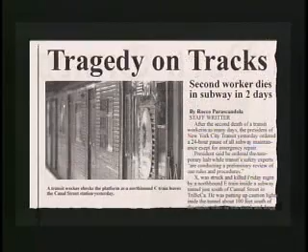Subway signals can be dangerous work. Tonight, investigators are looking into the death of a subway worker who was hit by a train on the Upper West Side. We have breaking news on the Upper West Side. A train has hit a transit worker, actually has killed him, trapped him under the train. Number 3 line service is suspended. After the death of a subway maintenance worker, he was killed when he was hit by a train yesterday, and now some are asking, did the transit... After the death last week on the tracks of 2 transit workers, there remain several unresolved safety questions.

Hey, Charlie, what you doing? Hey, Howard. Morning, Charlie. Morning, Chris. How was your night? Not too bad. Just had a dark signal, track circuit a couple hours after that. Nothing big. Yeah, but we didn't get to finish the stuff we were scheduled to do. Oh, yeah, thanks for reminding me.

Listen, Charlie, you think you can help us out a little bit? Just a couple of stop arms that need to be gauged and painted. Yeah, no problem. Steve and I'll take care of it if we have the time. Where is Steve, by the way? He's usually here before me. Haven't seen him. He must be running a little late. You'll take care of that for me, right, Charlie? I don't want to get tied up with this routine stuff before I go on vacation. I'll pay you back. Yeah, okay, no problem. I'll see you guys tomorrow. All right, take care. Take care, Charlie. Yeah, see ya.

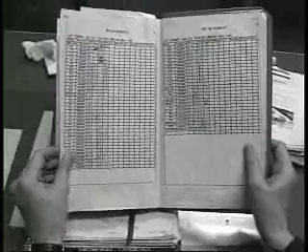I don't want to have to wait around here all day for Bobby to get back to me. Maybe I'll just call him. Busy. Figured. Probably forgot about me. He said he was going to call back in a little while. That was an hour and a half ago. Maybe there's some small jobs I can take care of on my own. Something I can get done without Steve having to help. What routine stuff do we have scheduled for the next couple of days? Most of this stuff I'd need Steve to help me with. Hey, what about that stuff Howie and Chris were talking about? Something to do with stop arms, gauging them or something? I'll probably be back before Bobby remembers to call me. Now, where were they?

Here it is. Good. They're one stop away. Right near that spur track that's hardly used. Good. This will be a piece of cake. I can go there, gauge those 2 stop arms, and be back before anybody knows it. And I can definitely take care of this without Steve. I don't even need him to flag for me, since that spur is hardly ever used. I don't think they use it to turn trains anymore. I'll probably even have time to stop and pick up lunch on the way back. ...anyone knows it.

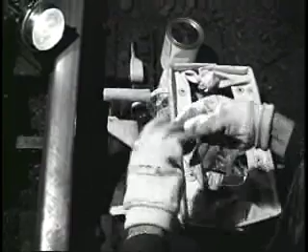I hope he's okay. This must be the one. Let's finish this up and get back to the quarters. Oh my God!

And that's how it happened. This incident could have been prevented had the rules and regulations governing employees working on the tracks been followed. These rules and regulations outline the procedures that protect you from the major hazards found on the tracks.

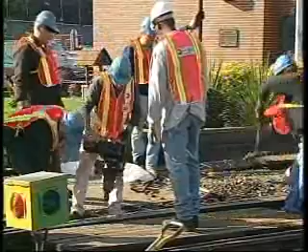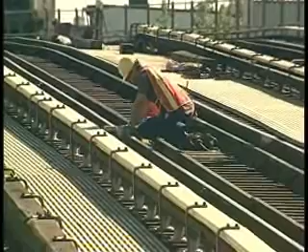The major hazards to be aware of when working on or near the tracks are moving trains, energized third rails, physical condition and configuration of tracks. At least one of these hazards is always a factor in all employee accidents on or near the tracks. The cause of employee accidents on or near the tracks can always be traced to employees forgetting the seriousness of these hazards and by not working safely.

The most frequent causes of employee accidents on the tracks are stepping onto a track without first looking in both directions, walking in the same direction as train traffic, not clearing up properly, not setting up or working without proper flagging protection, obscured vision of train traffic due to track configuration, encountering unexpected train movements, coming in contact with an energized third rail.

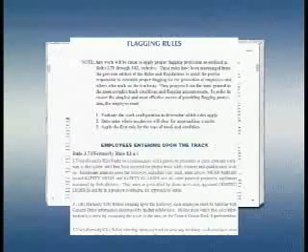All these causes can be neutralized and accidents eliminated by following established methods and procedures as outlined in the MTA New York City Transit Rules and Regulations. These methods and procedures are taught to all personnel whose duties and responsibilities require them to work on or about the tracks. Under no circumstances will any employee be permitted to enter upon the trackway until they have received the proper track safety training and are duly qualified to enter upon the tracks.

Before any work is performed on the tracks by you or any employee, your supervisor must hold a pre-job meeting to designate a flagger, describe the type of flagging protection to be used, as well as outline the work to be performed. The designated flagger will not perform any duties other than those of a flagger. The supervisor must also provide an opportunity for you to discuss all concerns you may have about the work that is to be performed. The supervisor will also ensure that all employees are wearing the proper personal protective equipment.

All employees working on the tracks must familiarize themselves with all general orders that may be in effect in the area where they will be working. You must verify that this information is current by contacting the interlocking tower for the work area or the RTO Control Center Desk Superintendent. Before entering upon the tracks, you must notify the RTO Control Center to inform them of your location by train line, nearest station, track number, and survey marker.

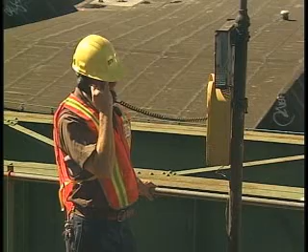You will also tell the RTO Control Center the type of work that is being performed and the type of flagging being used. You should also give your department, name, title, and pass number. Remember to get the name, title, and pass number of the individual you are speaking with. You should remember to look in both directions for oncoming trains before descending to the trackway.

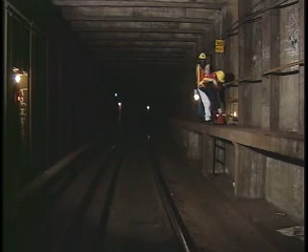When using a ladder to descend to the tracks, you should exercise caution and always use the 3 points of contact rule of thumb. The 3 points of contact rule of thumb should also be used by all employees that may have to climb up and down a train. 3 points of contact will help prevent you from losing your balance while climbing up or down from the tracks or a train. Simply stated, the 3 points of contact rule of thumb emphasizes maintaining a secure grip with both hands and secure placement of one foot, or secure placement of both feet and secure grip with one hand, to maintain balance and safe ascent and descent.

While performing any duties on the tracks, you must always wear your safety vest. You should not wear loose or ill-fitting clothes, tinted or dark glasses, or any device that would impede your vision or hearing. Once on the tracks, you must be constantly aware of your surroundings and alert for oncoming trains.

Keep in mind that the use of continuous welded rails has diminished the noise generated by oncoming trains. Also, newer train equipment runs quieter than that of the past. You should always be aware of no clearance areas and safety niches. You must also be extremely cautious when walking along the trackway to avoid slipping, tripping, or falling hazards.

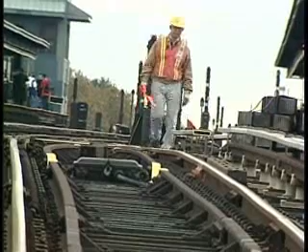Remember to walk against the normal direction of traffic, being mindful that trains may run in either direction at any time. While walking on the tracks, you should stop before turning around to look behind you for any reason, especially for oncoming trains. You should only walk in the area of track where the cross ties and ballast or concrete are, or on approved walkways, such as bench walls or catwalks.

You should avoid walking or stepping on running rails. Also, never walk between a running rail and the third rail. Always assume the third rail is energized and avoid walking or stepping on the third rail protection board. Avoid walking over, on, or near the moving parts of an interlocking switch. You must be aware that the switch can be activated at any moment, and never assume that an area of track is out of service.

Employees not working on the tracks, such as train crews walking to a train on a storage track or personnel walking to an interlocking tower, do not need to display any special warning lights or flags, nor to set up full flagging. They do, however, need to be equipped with an approved light and all necessary personal protective equipment. They must also exercise caution when walking on the tracks.

MTA New York City Transit has established a uniform method and procedure for all employees who perform work on the tracks in pairs or small groups, and who may move from point to point along the tracks. No employee is allowed to perform any work on the tracks at any time at any location, unless accompanied by a qualified flagger.

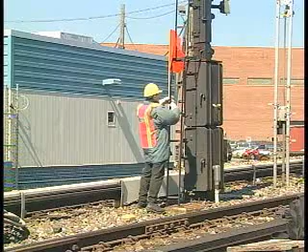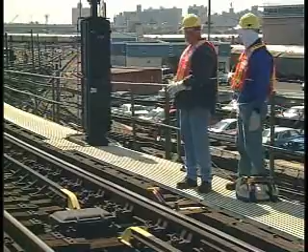If the work being performed is outside, between sunrise and sunset, the flagger must be equipped with a whistle and an approved fluorescent orange flag. The flagger will place the light or flag 650 feet from the beginning of the work area and will perform no duties other than acting as flagger. The flagger must be positioned no less than 50 feet from the work area and be able to communicate with the workers and have an unobstructed view of the caution light or flag.

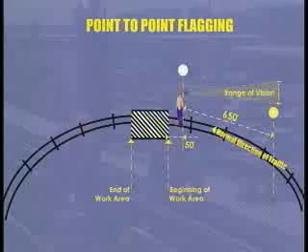If, for any reason, the flagger's view of the light or flag is obstructed, or communication with the work group is not possible from the flagger's position, full flagging protection must be established before any work may be done.

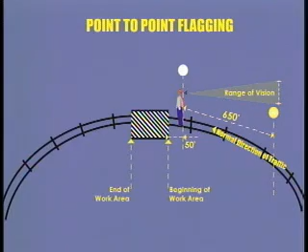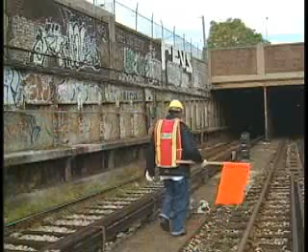If the work being done is between two tracks, or on a lead track, loop track, or mainline middle track, or where it's not uncommon for trains to operate in either direction, an additional flagger equipped with a whistle and flashing yellow light or fluorescent orange flag is required.

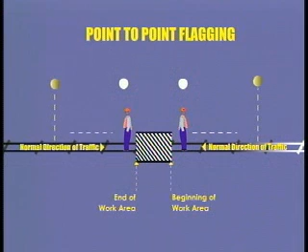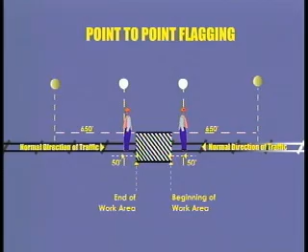Each flagger will place a light or flag 650 feet from their end of the work area and will not perform any other duties while acting as a flagger. Each flagger will be positioned no less than 50 feet from the end of the work area, and both are responsible for warning the work group of approaching trains from their positions.

Whenever work is being performed on a station platform within 2 feet 6 inches of the edge of the platform, or you're working on a ladder that is within a distance equal to or less than the height of the ladder, a flashing yellow light or fluorescent orange flag must be placed no less than 650 feet in advance of the work area and in the tunnel, open cut, or elevated structure.

If for any reason the sight of flashing yellow light or orange flag is obscured, full flagging protection is required. In all cases, the flagger must be able to see the light or flag and be able to see and communicate with those in the work area. Otherwise, full flagging protection must be used.

When any work being done requires full flagging protection, the supervisor of the work group will not allow any worker to go on the tracks until full flagging protection, as outlined in the pre-job meeting, has been established. Before flagging protection is established, the maintenance supervisor will notify the RTO control center and request permission to set up full flagging protection so that track work may begin.

To establish the basic full flagging protection, at least 2 qualified flaggers are needed. One flagger will set up the necessary lights or flags, while the other flagger watches for and warns of approaching trains. The correct way to set up full flagging protection is for you to first set out the green light or flag. The green light or flag must be placed no less than a maximum train length from the end of the work area for the subdivision where the work is being done.

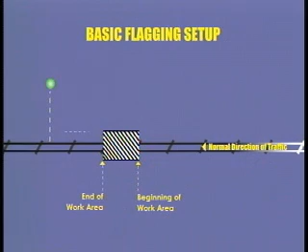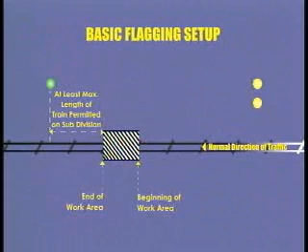Next, you place 2 yellow caution lights or flags out at a point on the tracks not less than 500 feet nor more than 700 feet from the area that has been selected as the flagger station. If your view of the caution lights or flags is limited or obscured for any reason, an auxiliary flagger must be used to warn the work group of approaching trains and be stationed at the furthest visible point from the flagger. The caution lights must be placed with an unobstructed view 500 to 700 feet from the auxiliary flagger station.

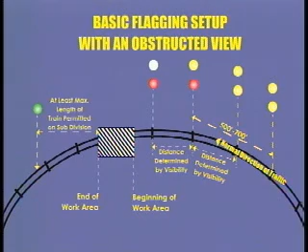If they are still not visible, an additional set of caution lights must be at the furthest visible point from the auxiliary flagger. You should set up the flagger station no less than 150 feet from the beginning of the work area. The flagger working the flagger station will be equipped with a whistle, a red light or flag, a white light, a portable train stop, and a stout piece of cord 4 to 6 feet long attached to the red light and portable train stop.

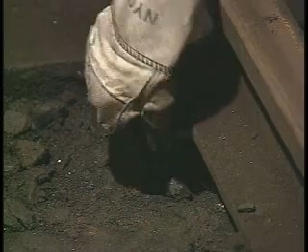Any auxiliary flaggers being used will also be equipped with these items with the exception of the white light. Auxiliary flaggers will be equipped with a yellow light instead. The portable train stop is attached on the outside of the running rail to ensure the positive stop of an approaching train should the train operator fail to acknowledge the stop signal given by the flagger. When setting up the portable train stop, be sure to attach it to the outside of the proper rail for the division where the work is being done.

In Subdivision A, the portable train stop will be attached to the outside of the running rail that's on the same side as the train operator's operating position. In Subdivision B, the portable train stop is attached to the outside of the running rail, opposite the train operator's operating position. Regardless of the flagging setup or the work location, the flagger station must be set up 150 feet in advance of the work area. This completes the basic full flagging setup.

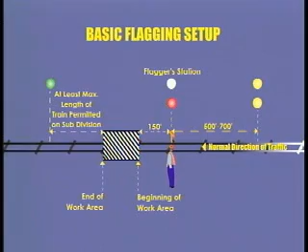The basic full flagging protection setup has many variations you may use depending on the track configuration for the area where you're working. Different track configuration will require the use of additional caution lights and additional flagging stations to ensure you and your coworkers' safety and the safe passage of trains.

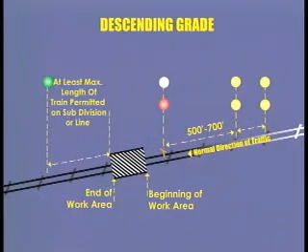Your supervisor will discuss the track configuration for a work area and how you'll set up flagging protection during the pre-job meeting. For a more detailed explanation of the various flagging setups, you should refer to your MTA New York City Transit Rulebook. There are several ways you can calculate the correct distances to place the flagging lights or flags and portable train stop within a flagged area.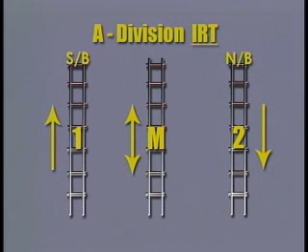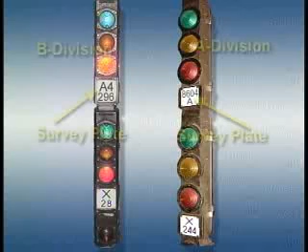All tracks are lettered, numbered, and measured from a predetermined fixed point. Subdivision A tracks are numbered across from south to north. In Subdivision B, all northbound tracks are even numbered, and all southbound tracks are odd numbered. If the work area has a middle track, it is designated as M track in Division A, and as track 3-4 in Subdivision B.

Every signal is equipped with a signal survey plate that has the track designation and survey number on it. Survey markers are stenciled on subway tunnel walls. In Subdivision A, the signal survey plate or survey marker on the tunnel walls may read something like 8604A. The letter designates the section of tracks. The last digit of the number designates the type and direction of the track. When calculating the distance between two signals or survey markers, this number is not used.

In the B division, a signal survey plate or survey marker may look something like A4296. The letter tells you the section of track, and the number the type and direction of the track. To calculate the distance between two signal survey plates or survey markers, subtract the smaller number from the larger. Next, add 2 zeros to the end of the resulting number. This is the distance in feet between the two signal survey plates or survey markers.

For instance, survey marker X is designated A4296 and survey marker Y is A4304. 304 minus 296 equals 8. Put 2 zeros after the 8 and the distance between the two survey markers is 800 feet.

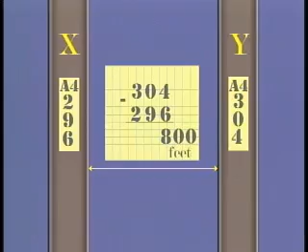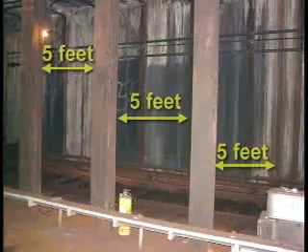Another way to measure distances, though perhaps less accurate, is to count the number of columns or survey markers on the trackway. Columns on the trackway and on station platforms and survey markers on the trackway are standard distances apart. Columns on the tracks are spaced 5 feet apart. Columns on the station platform are spaced 15 feet apart. Survey markers are spaced incrementally 100 feet apart.

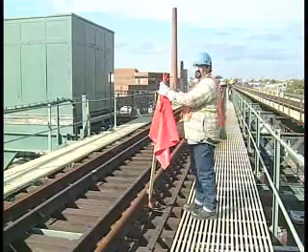The hand, flag, light, and sound signals you use to communicate with your co-workers being protected and the train operators on trains are standardized and must be used at all times, regardless of the type of flagging protection, whether it's point-to-point flagging or full flagging. When you're flagging for others on the track, and you see a train approaching, you should alert everyone by blowing your whistle once. You should continue to signal the train with the proper hand signal until it comes to a complete stop at least 1 car length away. You may use any color light to signal the train to stop.

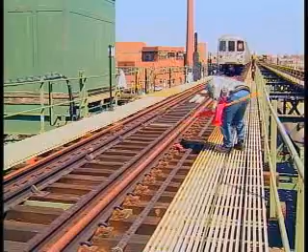Once everyone has cleared up properly, they will signal you with a proceed signal and 2 short whistles. You should acknowledge their signal with 2 short whistles of your own. Then, after you have concealed the red light and removed the portable train stop and cleared up properly, you will signal the train to proceed by moving your hand, a white light or yellow light, in an up and down motion. It's important to remember that a proceed signal can never be given with a red light. Train operators are taught that any signal given with a red light means stop.

The train operator should acknowledge your proceed signal with 2 short blasts of the train horn. Train operators should then proceed with extreme caution, operating at no more than 10 miles per hour, being prepared to stop within 1/2 their range of vision. Train operators are taught that if a yellow light is used to give a proceed signal, they can expect to find more flaggers and workers on the tracks ahead.

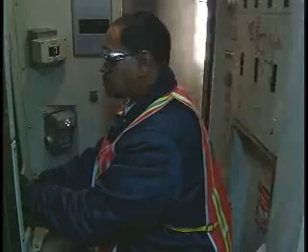Train operators are reminded to operate in accordance with the aspects being displayed by any fixed wayside signals they may encounter as they proceed through a work area, and any fixed wayside signals at or near the flagger station. As flagger, you must be careful not to give a proceed signal that conflicts with any fixed wayside signals.

When working on the tracks, all workers should clear up on the same side of the track. When clearing up between columns on the tracks or in a recessed safety niche in a tunnel wall, you should have a handhold on the columns or wall to steady yourself and turn your eyes away from the passing train to prevent any arcing from temporarily affecting your eyesight.

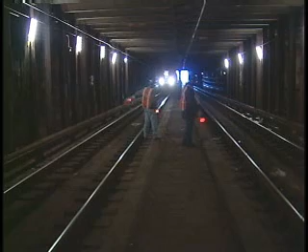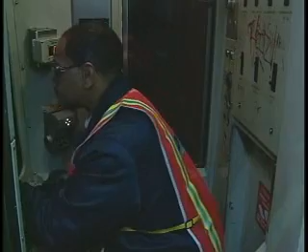You should avoid clearing up between 2 tracks where there are no walls or columns. If it does become necessary to clear up to an adjacent track, you must make certain that there are no trains approaching on the track. If a train is approaching on the adjacent track, you must signal it to come to a complete stop before anyone can be allowed to clear up to the adjacent track. At no time should you allow trains on both tracks to pass you simultaneously, where there are no walls or columns between tracks.

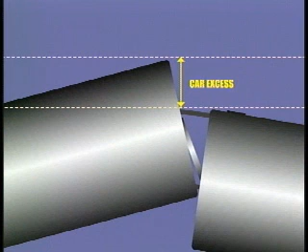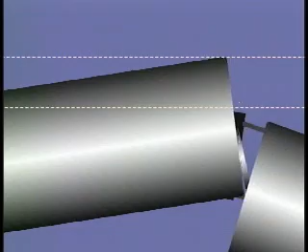Another thing you must keep in mind when clearing up is that the newer car equipment is longer. This greater length creates more end and center excess on passing trains. This means the end of train cars will swing out farther than expected on the outside of a curve. Similarly, the center of a car will restrict clearance on the inside of a curve. This is also true when a train is going over a switch. You must take these facts into consideration when clearing up near curved track or switches.

One last thing about clearing up on the tracks: always be aware of no clearance areas. Be extra cautious in these areas, as you'll have no place to go if a train comes along. When performing any duties on the tracks, you must always be aware of where the third rail is. The third rail is energized with 600 volts of electricity. Avoid contact with the third rail under all circumstances.

Always assume the third rail is live, regardless of what may be said to the contrary in any general order you may be working under. Keep in mind, the limits of any power off area and the limits of the general order are not necessarily the same. In fact, some general orders operate with the power on. Also remember that you should never sit, stand, or walk on the third rail protection board. Another reminder for you is to never walk between the third rail and the running rail. Coming in contact with an energized third rail will result in serious injury, maybe even death.

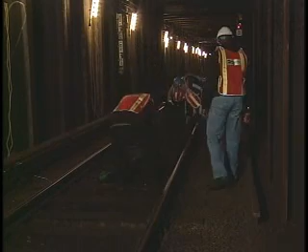In the event you're working near a live third rail, you should place a rubber mat, specifically designed for this type of work, over the third rail. It's important to check if the mat is torn or in need of repair. If it is, don't use it. Report it to your supervisor, who'll get you a replacement. Any tools you need to do your job when working around or near the third rail must be insulated with non-conductive material to prevent serious injuries.

Another thing to keep in mind when working on the tracks is the contact shoes of a train. You should consider the contact shoes of a train an extension of the third rail. If any individual contact shoe of a car of a train is in physical contact with the third rail, all remaining contact shoes are energized with 600 volts of electricity, even if they are not in contact with the third rail. Physical contact with any of these energized contact shoes is extremely dangerous and will result in serious injury, maybe even death. Whenever you're working on the tracks in Division A, be aware that the contact shoes on trains protrude 7 inches from the car body. Keep this in mind when clearing up in all areas of the tracks.

When your work on the tracks is completed for the day, everyone must be off the tracks before you can begin to remove the portable train stop and lights or flags being used for flagging. Keep in mind that 2 qualified flaggers are needed to break down the flagging protection. One flagger will watch for approaching trains, while the other flagger removes the lights or flags from their position.

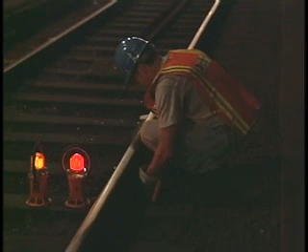Once everyone is safely off the tracks, the proper way for you and a partner to break down flagging protection will be to remove the portable train stop completely. You and your partner will then remove the red light or flag and hide it so you don't cause unnecessary delays in train service. Next, you and your partner will remove the yellow caution lights or flags.

You'll remove the green light or flag and get yourselves off the tracks, always exercising the necessary precautions as discussed earlier. Once everyone is off the tracks, the supervisor or individual who called the RTO control center earlier will now call again and inform them that all work has been completed and all personnel are off the tracks and all flagging lights or flags have been removed.

Service disruptions are sometimes caused by maintenance of way equipment failure. Repairing this equipment in order to quickly restore service to our customers may require full flagging protection. To establish full flagging protection during service disruptions caused by equipment failure, where trains are stopped within the affected area, New York City Transit has established procedures that must be followed. These procedures will protect employees performing the repairs and help restore service for our customers.

These procedures require the cooperation of maintenance of way personnel, rapid transit operation personnel, and the Department of Subways Control Center. These procedures will allow stopped trains to safely pass out of the affected area so that full flagging protection can be established and the repair work can be done safely.

The Department of Subways Control Center will first order all trains in the affected area to stop and stay and wait for further instructions. Control Center personnel will next instruct all trains operating on any tracks adjacent to the affected track to operate cautiously at restricted speed and to be aware that maintenance of way personnel are responding to the affected area.

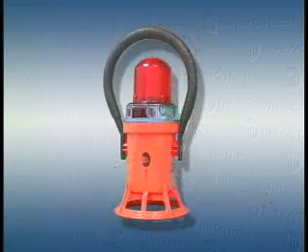Responding maintenance of way personnel, equipped with a flashing yellow light or fluorescent orange flag, a portable train stop, a red light or flag, and an approved light, will approach the first stopped train in the affected area and establish face-to-face communication with the train operator. Responding personnel will order the train operator to stop and stay, regardless of any other signal indications or aspects, until given further instructions by responding personnel.

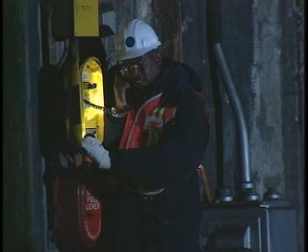Responding personnel will then attach a portable train stop to the correct running rail for the division. Next, responding personnel will place a flashing yellow light or fluorescent orange flag 150 feet in approach to the portable train stop. Once the portable train stop and flashing yellow light or fluorescent orange flag are in place, responding personnel will contact the Department of Subways Control Center to determine the total number of trains that must be moved through the affected area.

It is important to remember that the portable train stop must be attended by a qualified flagger at all times, while responding personnel perform the required task to facilitate the movement of all stopped trains within the affected area. Before allowing any trains to resume operating within the affected area, responding personnel must inform the Department of Subways Control Center of any restrictions on train operation and service. The Department of Subways Control Center will inform all train operators on all stopped trains on the operating restrictions for the affected area.

Once the number of stopped trains in the affected area is determined and the Control Center is aware of all operating restrictions and has informed all operating personnel on the stopped trains, responding personnel can begin facilitating the movement of trains out of the affected area. Once satisfied that all responding personnel are in a safe place and cleared up, and it is safe to allow the stopped train to proceed, the flagger will remove the portable train stop, conceal the red light or flag from the train operator's view, and give the proceed signal to the train operator.

After the passage of the last stopped train, responding personnel will contact the Department of Subways Control Center and request permission to establish full flagging protection to make the necessary repairs. Full flagging protection must be implemented before any work can begin.